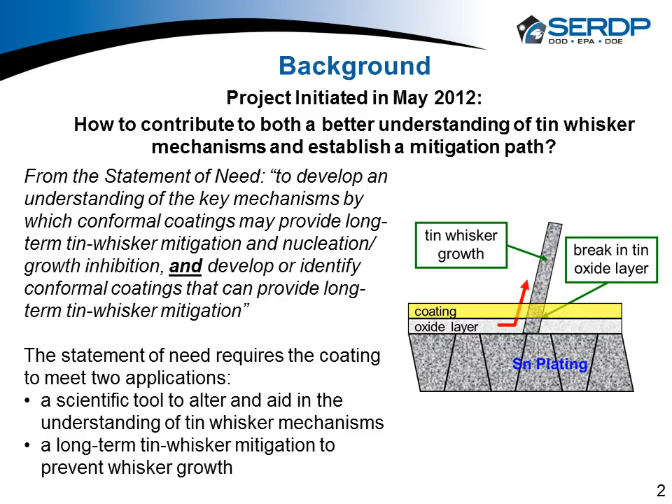I'm on slide 2. I'm going to go to slide 3. And Rockwell's approach is to look at a family of materials called alkali silicate glasses. And one we have been using, as I'll talk in a couple of the other slides, we've been using the ASG, or I call it liquid glass, in some other systems, so we thought it was applicable to whiskers.

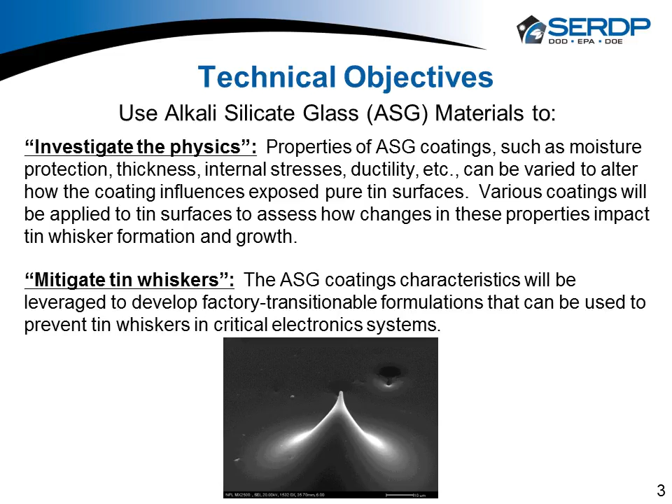And more importantly, the properties of liquid glass, the ASG coating, they can change how moisture goes through surfaces. They're very tailorable, and we felt that it was a system that offered some advantages to how we could impact tin whisker formation and growth.

So if you go to slide 4, from our technical approach, if I put my engineering hat, or my scientist hat on, say, what do we need a conformal coating to do in terms of how it protects our electronics? Or maybe more importantly, what do I want out of a coating that changes whiskers' behavior? One of the things would be, can it stop moisture? Can it alter the corrosion of tin oxide?

And SERDP has a couple other projects going right now with Dr. Stephan Meschter and Dr. Polina Snugovsky looking at corrosion. And they've made some really neat discoveries and findings with their results showing that moisture and whiskers, there is a relationship there. So any coating that's going to impact whiskers has to deal with corrosion. A coating ideally would bond to the outside layer of tin in the tin oxide. Being bonded would change some things around, especially having a whisker initiate and form.

You'd like the coating to be tailorable. So do I want it rough? Do I want it smooth? Do I want it to have less stress, lower, higher stress? What can you change in the coating that could then impact whiskers?

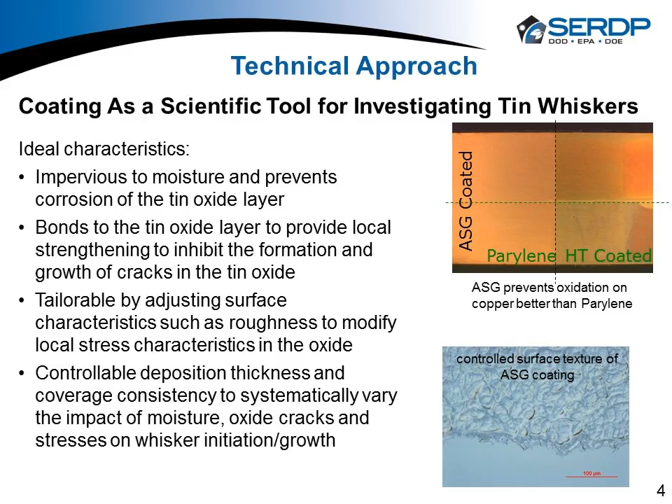And of course, I want to be able to deal with the coating in terms of its deposition thickness and its coverage. If it's a great coating, but I can't get it down in a repeatable, consistent thickness, I'm in trouble. Or if I have trouble getting it to have good coating coverage consistency, then it's not the most ideal thing to work with.

If we go to slide 5, put my engineer's hat on. I'm out on the factory floor building electronics. One of the things I want my coating to do is I want a high modulus, I want a high hardness. So if a whisker does initiate, it's going to have a tough time working its way through the coating.

And again, SERDP also has some sister projects to the project I'm presenting today. Dr. Stephan Meschter and the gang are working with putting particles in coating. And so this project looks at one method of slowing down whiskers, and SERDP has a couple others that both look like they're going to yield some things.

Whatever coating I have, it really has to be able to cover the complex surfaces of an electronics assembly. Electronics assemblies have a lot of skyline, a lot of X, Y, and Z dimensions. I want to be able to coat the edges of leads, behind the leads, areas where whiskers might initiate and grow.

Number one, and I get beat up by my folks here at Rockwell all the time, don't create some process that's some special, unique, we've never seen it before. I want to go out to my typical factory. I want to be able to use typical temperatures.

I want to be able to cure it in conventional ovens. I don't want to have to go buy a $3 million machine that this is all it does. Of course, the factory folks, they want short deposition times, short cure times. They're looking at their process cycles. And then, of course, last, want to be able to rework this. So that's kind of the wish list from a science or an engineering perspective.

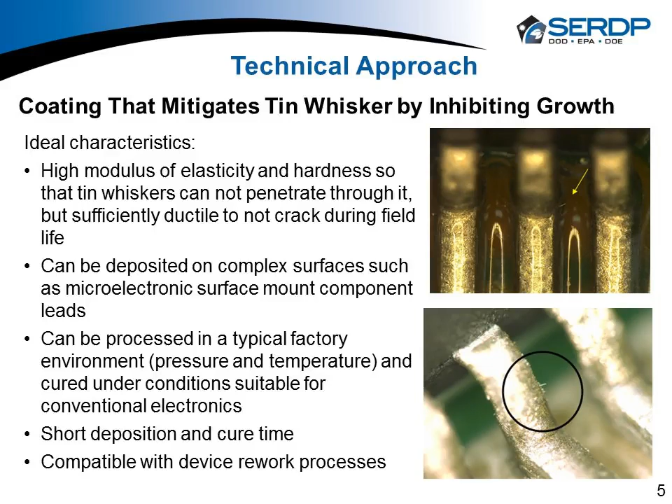If we go to slide 7, a little bit on liquid glass or alkali silicate glass, ASG specifically, kind of a very nice material. We've been using them for a couple other things, other products, but you can control the deposition rates. They're highly tailorable to what you want to do. They also cure, and essentially when I say cure, these are coatings that are based on a water solution, not solvent solutions, so you're driving off the water. But it happens at right around 120, 125 degrees C, and those are temperatures we see in the factory every day in terms of curing other types of adhesive materials, so that wasn't a shock to the system.

We know that the liquid glass will work in electronics. We're using it right now on some temperature issues where you're trying to do a lot of heat transfer. You can put diamond particles into the liquid glass, and it allows for a lot of thermal type applications. So that's why we proposed this material system.

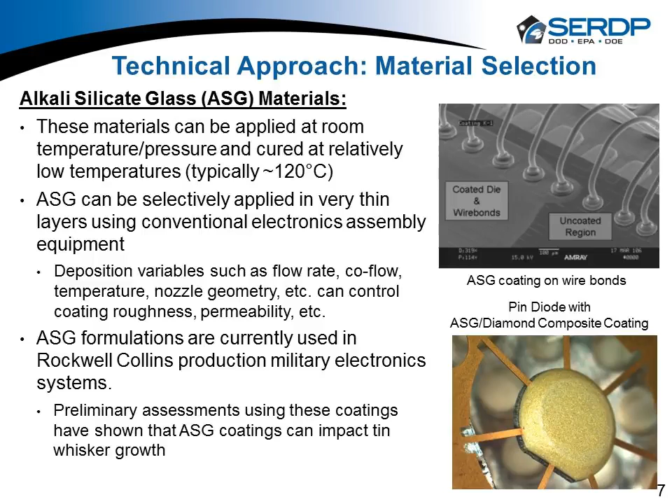If you go to slide 8, our primary test vehicle for all the testing in phase 1 and phase 2 is what we call Tinman. We needed a component I could put in the scanning electron microscope that would not charge up, but I also wanted a component that very much mimicked and was representative of other components I find on my electronics assembly. So we essentially made a 14-pin SOIC, a small outline integrated circuit, and it's all metal.

We're able to take this and coat it with bright acid tin plating. It plates very well, and bright acid tin is one of those things we know in the industry that grows whiskers like chia pets. So it made a great control, because if your control doesn't whisker, you don't know anything else about the other variables in your test.

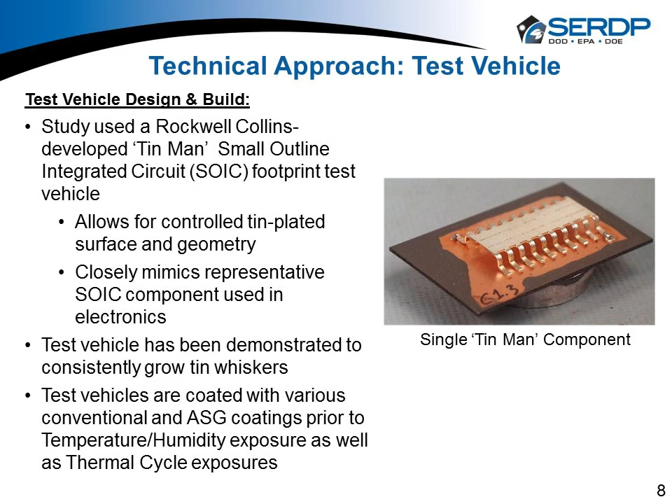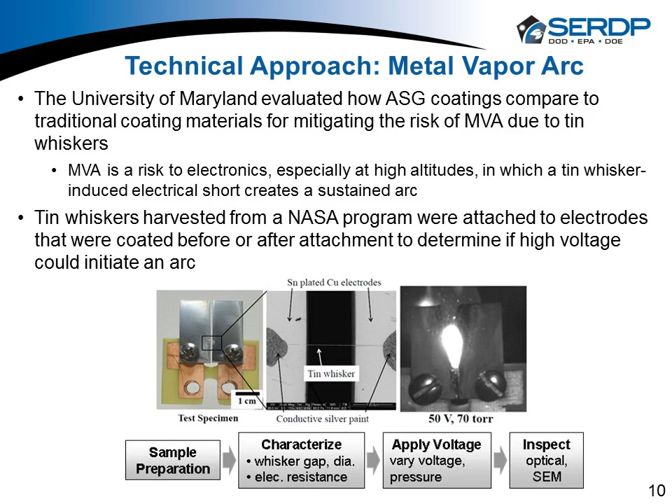But very interesting. I think Mike killed 2 or 3 grad students doing this, but he actually took whiskers and we glued real actual whiskers across 2 electrode surfaces to create the test specimens. And I'll talk about some of those results, but some very neat things we were able to learn out of the program. Of course, last but not least is the guys at Plasma Ruggedized Solutions.

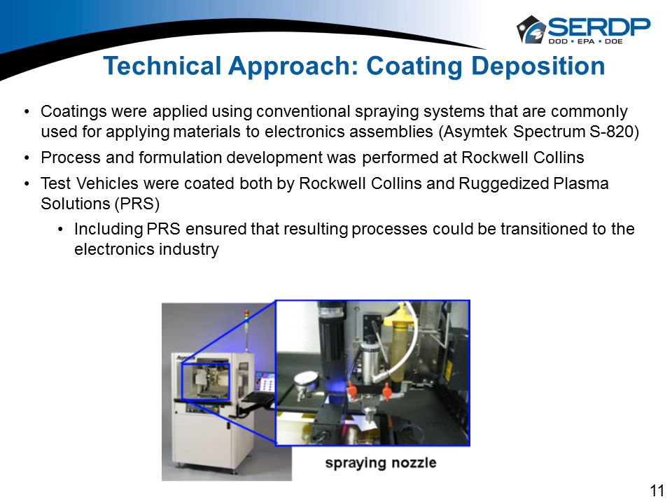Whatever we came up with here in terms of using equipment, could they replicate, and would they have any suggestions on improvements? And we use a standard system, the Asymtek Spectrum S820. We use it in our current operation, spraying conformal coatings. It's a widely used piece of equipment around the industry. So that got us back to being away from some specialized type of thing.

If you look at the program overall, we split it into 2 phases, each phase being 1 year. Phase 1 was some pretty heavy developmental, looking at the material, getting the initial formulations of liquid glass and seeing how they performed. And then phase 2, we left ourselves a little bit of a window to try taking what we learned in phase 1. Do we need to change the formulations, improve the formulations? And then in phase 2, as you'll see on further slides, we got into building real assemblies.

I'm a big one on testing widgets, but widgets don't tell you the real thing. We felt you needed to get out on the production line and try some things. So that's what we're going to cover in phase 2. And you can see in the graph here, we've tried to highlight each of the partners where they worked. Primarily in phase 2 was PRS and Rockwell, and the CALCE folks, University of Maryland, was in phase 1.

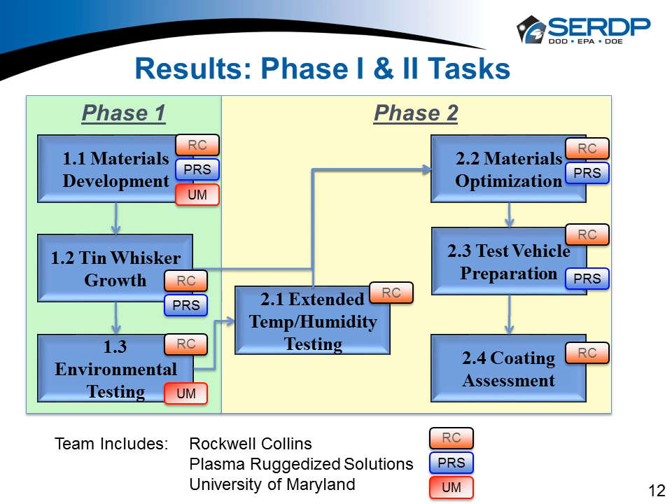One, our pretreatment. It'd be nice if I didn't have to pre-treat a board, but we did show that we needed UV ozone or even some plasma, but primarily UV ozone to prepare the surfaces. We're spraying the liquid glass on a standard circuit board, so you're seeing plastics, metals, solder mask, a number of organic and inorganic things, and the UV ozone just promoted better adhesion for what we wanted to do. We also learned that to really control our thickness, we had to watch our barrel pressure and our co-flow pressure. And we found a number of interactions we made sure we controlled as we sprayed.

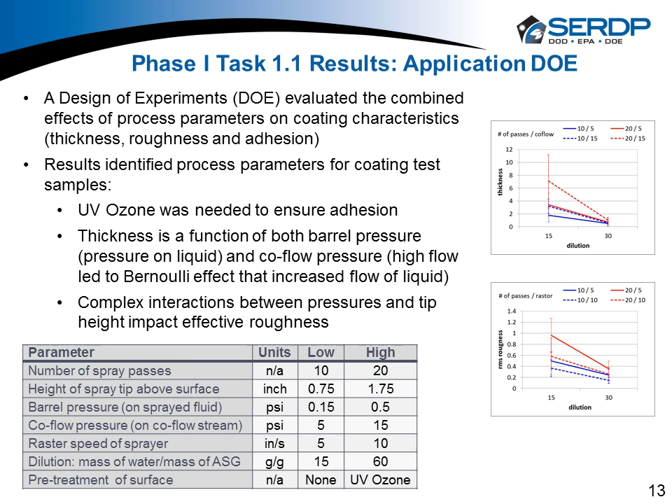From our industry work, where the lead is bent during lead forming, that's the high stress area, and that's where we saw most of the whiskers initiate and start to grow.

We also did a second set of boards based on discussions with Dr. Stephan Meschter from BAE and some of the work they're doing in their SERDP projects. We kind of teamed up. We wanted to see - one set of these specimens was going in and out of the humidity chamber every 500 hours. We'd take them, look at them in the SEM, put them back in the humidity chamber, but that's about 24 hours of exposure. Did coming out of the chamber change the behavior?

So we had a set of specimens that we pulled out, inspected, and never went back in. Those were staggered such that we would accumulate 500 hours, 1,000 hours, 1,500 hours, trying to see if there were any differences there.

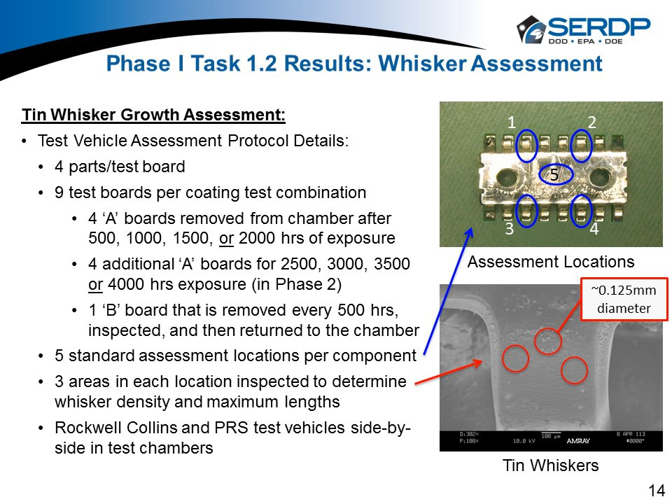When we looked at these specimens, we got down to looking at each of the 5 areas, and we would go in and measure 3 different areas randomly. It's a 0.125 millimeter diameter, and we would measure lengths and measure whisker density. That's how we were tracking what was happening between the different variables in the design of experiments.

To go to slide 15 - when we started into this, based on the early work looking at the materials, we picked two different types of liquid glass, or alkali silicate glasses. You'll hear me talk about ASG4, which was a little more ductile formulation, the way the team looked at it. It didn't put as much stress into the substrate it was sitting on. And then we also looked at ASG5.

ASG5 was a little more stressful coating, but ASG5 also gave us better environmental robustness. Oxygen, moisture, things would not move through it or diffuse through it nearly as readily as ASG4. So it gave us two different angles to look at that.

Versus the ASG4, which is a lot less of a rigid coating with less stress, we didn't see nearly the behavior that we had with ASG5. That was nice - some of the science we were putting in, we were seeing differences in how you can formulate the composition of those coatings. It ends up that both formulations perform better than the control, but in the end the ASG4 coating was doing much, much better.

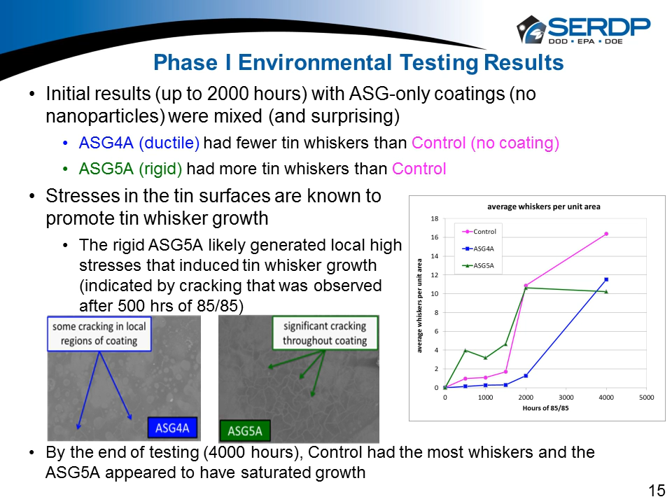Okay, thank you. We weren't expecting that, so again, some of the science we learned along the way, we thought that was pretty cool.

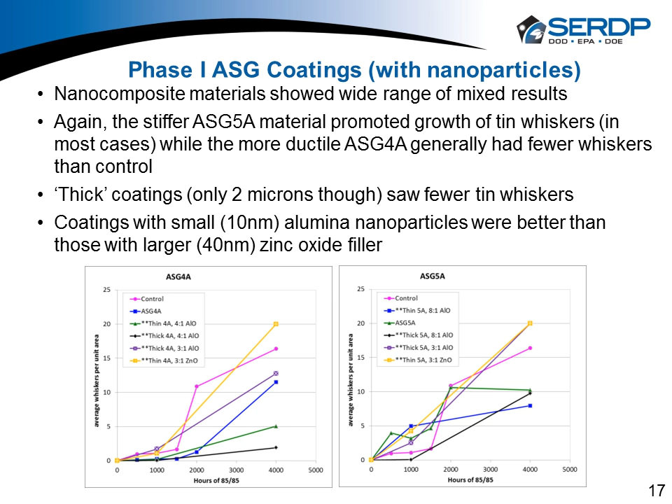There's still an acrylic coating over the top of it, but it's worked its way out. By the first couple thousand hours, of course, the conventional coatings looked better than anything. By 4,000 hours, everybody got up towards what our controls were showing.

A little tough time looking at Parylene. Parylene's a very uniform coating put down by vacuum deposition, but even with the Parylene, we got to that point. I think what was more encouraging was the samples coated by Plasma Ruggedized Solutions had the same behavior as the samples that we coated here at Rockwell. So someone using the same machine but a different facility, different state, completely independent coater of sorts, we ended up in the same place.

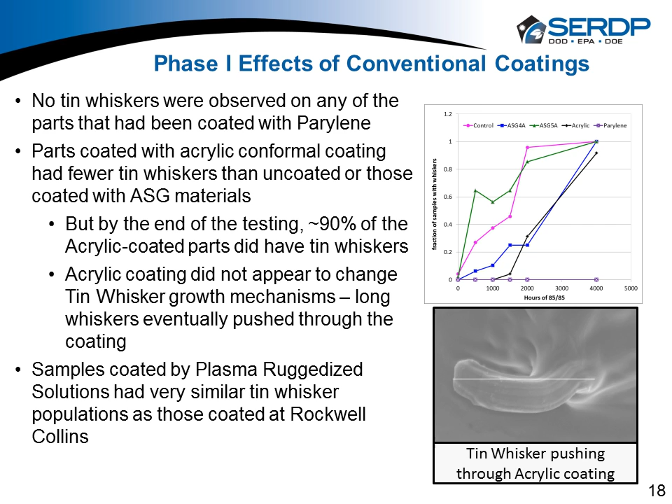One other thing to report on Phase 1 was the thermal cycling. We did 1,500 total cycles. That's what's called out in the industry specifications. And again, that was minus 55 degrees C to plus 125 degrees C, about a 1-hour cycle. It's truly thermal cycle, not thermal shock, so we transition at less than 10 degrees C per minute.

So we wanted to prove that we couldn't spall this coating off, that it was well adhered to the leads, the metallic leads on the components on the plastic. We didn't do any more thermal cycling after we finished this. We put all our efforts into the high temp, high humidity testing.

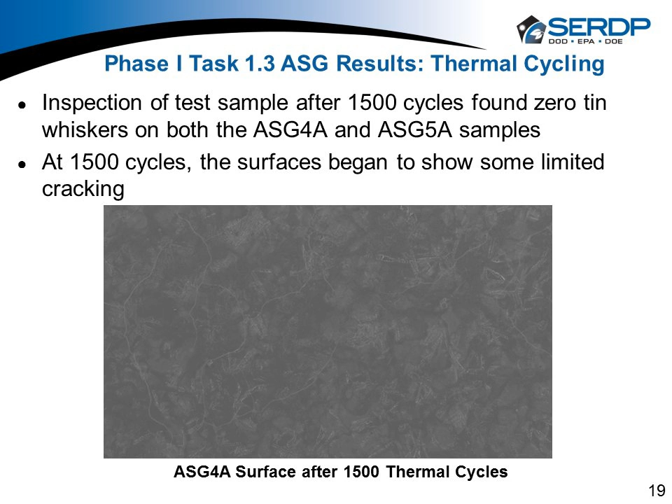And that's important because we wanted to see if you had a metal surface that grew a whisker, and it grew onto a surface that had a liquid glass coating, an acrylic coating, or a parylene coating—what would happen? Because a lot of people in the industry use that as a mitigation. We were able to show, during the program, that you are getting mitigation—that a whisker just touching the surface isn't enough. It has to grow through this surface and make metal contact. So somewhat obvious, but that data didn't exist in the industry. Now it's out there for other companies to use.

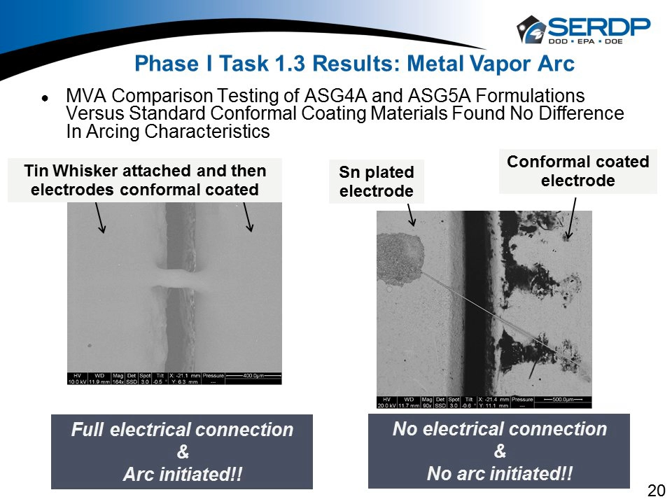If I go to cell 21, so at that point, well, that's phase one. We finished up. We were able to figure out what direction we wanted to go with coating. We figured out what we want to do with nanoparticles. Mike was able to do things at the University of Maryland looking at metal vapor arc, and the guys at PRS were able to replicate and show some improvements and things we were able to talk back and forth.

In phase two, we said we're done with widgets. I want to take a board. I want to go fabricate a board and do this. So we took the Sabre board. This is a board you can purchase from Practical Components, and we populated it. They're dummy components, but they're standard components from Amkor, who's a big supplier in the industry. And we're able to build this out on our line in our Coralville facility just like any other electronic circuit board.

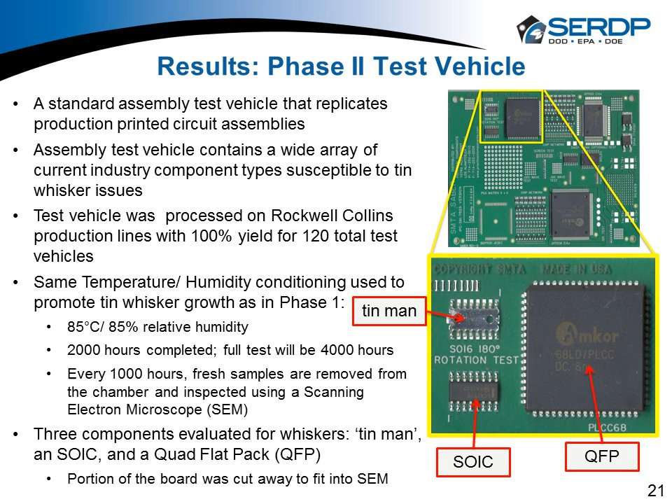They were not soldered down, so they weren't exposed to tin lead. So we ignored the corners and just focused on the middle. Okay, good point. I should have clarified that.

I'm going to go to cell 22. What we also have built into the program is we knew that Nate had seen some other particles that we might want to try. And so we knew alumina was really good, but we said, let's try zirconia. We had some really good results with zirconia on flat samples, not on test boards, but just on glass slides.

At the same time, Plasma Ruggedized Solutions and Nate found that there was a better application head. So we had been using the 787 dispensing valve, and Asymtek came out with an ultrasonic valve, which gave much better application speed and time. And so at phase two, we kind of switched gears a little bit. We kept our phase one valve, but we looked at a new application technology, and then we also looked at a new particle.

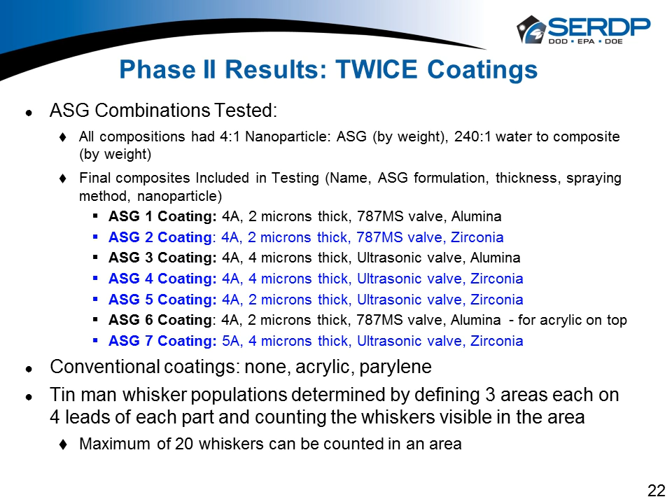Of course, in the test, we kept no coatings for control. We did acrylic, we did Parylene, we did the liquid glass, and we did the same type of measurement, whisker length and density that I discussed in phase one. So I'm going to skip ahead one cell, I'm going to come back. We're going to go to cell 24.

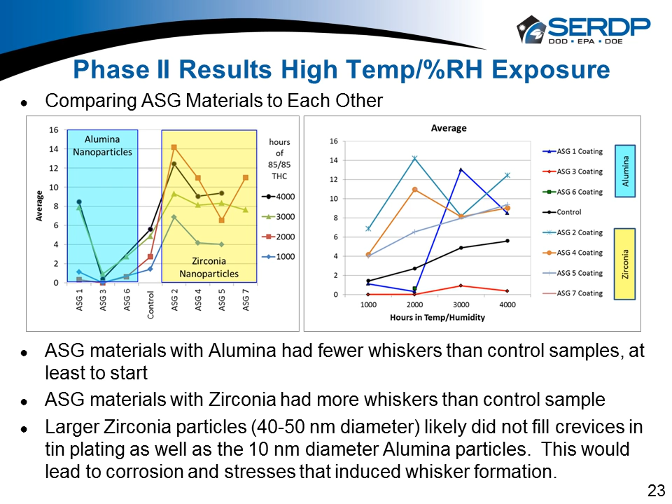If I jump out to slide 25, this is the data that compares how the liquid glass or the ASG coatings did against conventional, which was our Parylene and our acrylic. And sure enough, just like before, the initial 1,000, 2,000 hours, the acrylic and Parylene are looking real good,

but in the last half of the test, from 2,000 hours up to 4,000 hours, as the whiskers continued to grow, and of course underneath there, the acrylic or the Parylene do not have the benefit of having nanoparticles or being able to seal off the surface. They just don't have the same material characteristics.

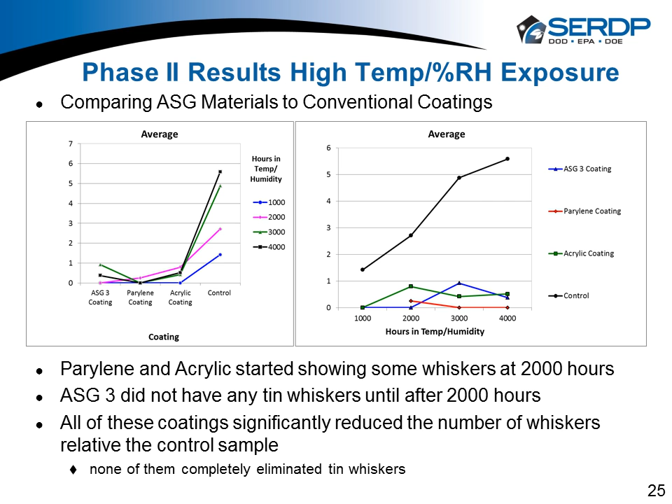One of the big questions that was asked during the program was, okay, coatings look great, but we know from conventional coatings out in the industry, there's concerns about coverage. And this is a picture here of an acrylic coating on our test boards, and you can see that the very sharp edge of the toe does not retain coating, or the back side of the lead here on the picture on the right on slide 26.

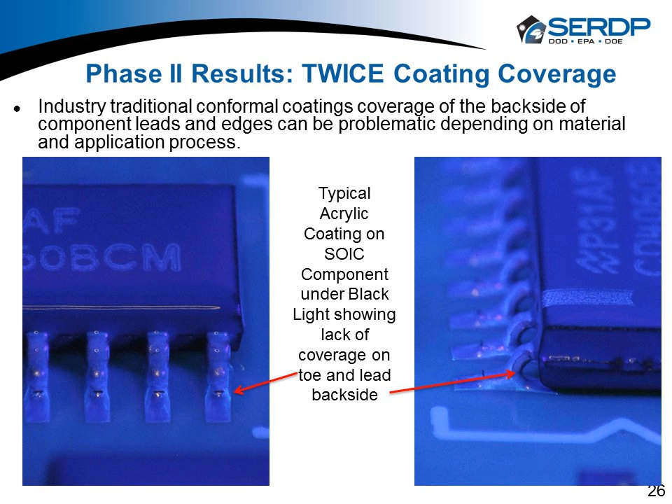You can see where under black light, we have good coating out here on the solder joint and the face of the lead off the SOIC, but the back side gets shadowed, and just standard conventional coatings without taking that into account leave a problem. So what we wanted to look at is, well, how do the ASG coatings go down?

And the picture here to the right, this is looking at the SOIC soldered down, and hopefully it shows up well, but there's kind of a ghosty, gray, milky look. That is the actual ASG coating. One of the advantages ASG has over conventional coatings is it's very, very thin. It's micron thin. And so physics, where it says on a sharp edge a coating is going to roll off that and not wet, is much more in play than with thin coatings that tend to stick and stay put on sharp edges compared to conventional.

The one thing we did, this picture on the lower left, I actually went in and we cut the pads off the board. Didn't want to cut up here. I wanted to try to keep the surface intact. And what you can see here, it doesn't show up as well as I'd like, but the nice milky ghosting coating view, that's the ASG coating on the backside. So one, the coating tends to go and cover areas that conventional coatings don't cover very well.

And two, because of our setup, we can spray in at different angles, and we have better spray penetration trying to come in and spray, say, at the backside or on this toe or from the top side. Just the nature of the coating lends itself to being applied with better coverage than some of the conventional coatings. Of course, Parylene is the best of all the industry coatings. Vapor deposition can coat everything uniformly. But if you're looking at, say, an acrylic or a urethane or epoxy, the ASG can do a better job of coating. It's on par, the same type of coating that would happen with a Parylene.

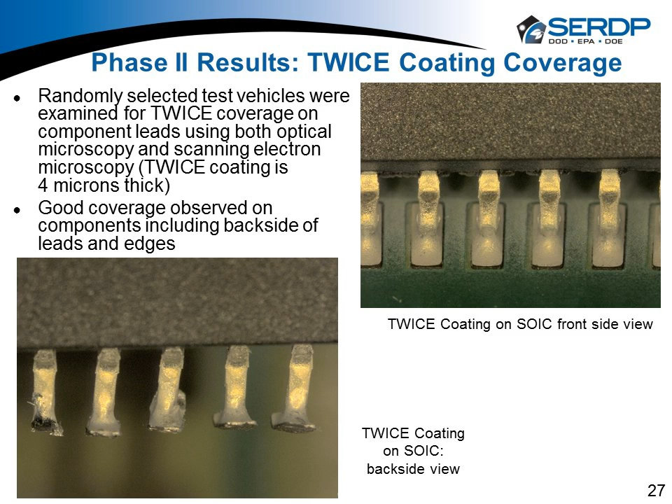We did one more thing I wanted to prove to myself, did I get coating down there? Because, yeah, it looks kind of gray and milky, but is that just optics, the light bouncing off it, or how good did we do? Thank goodness I have a wonderful metallographer who is very good, and we did cross sections, and you can see here's the solder joint, and here's my coating over the top to protect the surface. We use kind of an outer coating of potting, and you can see the coating itself on top of the solder joint right here. Very, very thin.

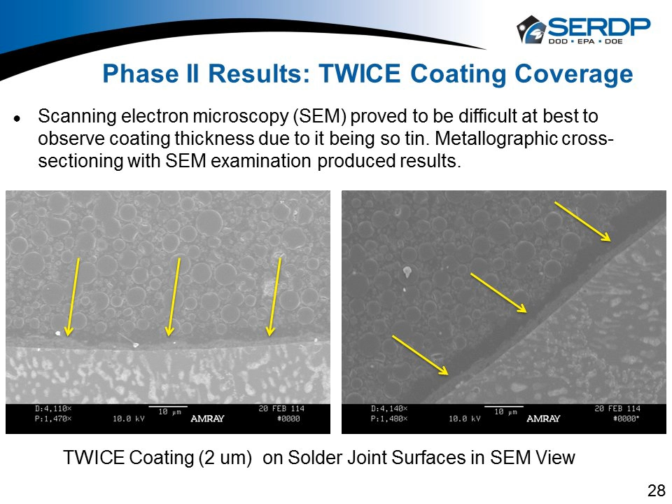This was the 2 micrometer coating that we applied, and this coating is about 1 micrometer to 1.5. So when we spray thinking we're getting 2, and we do out on a flat unencumbered surface, when you get to the topography of a circuit board on curved surfaces and things that have Z height, we're getting from 1 micrometer to 1.5 micrometers. So we don't quite hit this 2, but we clearly stay above 1.

If I go to slide 29, again in phase 2, working with PRS and looking at the new ultrasonic head, we're able to do some process improvements. So if you had the conventional machine that a lot of people have in the industry, and you put 4 heads on that and you wanted to spray a 2-micron thick coating, we could cover a 10 by 10 board in 12 minutes. And then, of course, it's going to be another 60 minutes to bake off the coating at 125 degrees C.

So we were pleased with that because one of my goals was to make sure I'm in line with other conventional coating cycle times. I did not want to have to spray for an hour and then bake for an hour because industry would not be very favorable. They would look at, well, yeah, the coating works better with whiskers, but it costs me 2 hours of cycle time, say, rather than 1 hour.

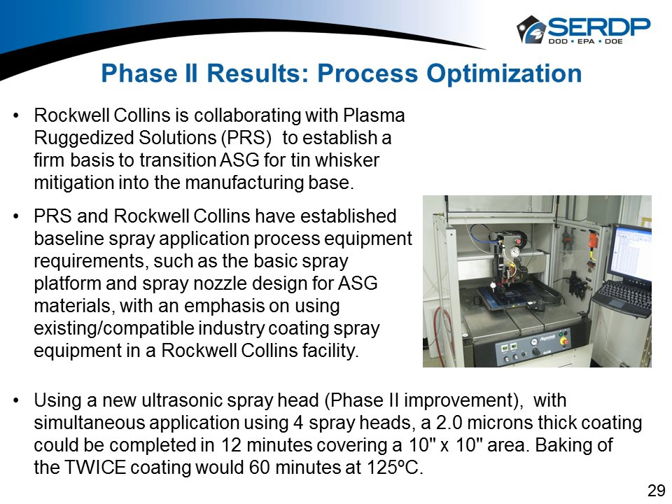And we wanted to try to hit that sweet spot where when you look at transition to an industrial base, you're more in line with what they're doing. And we were able to achieve that with the new head and doing our machine configuration. And PRS was able to do the same thing, so we were able to replicate that.

If I go to slide 30, this is brand new. No one's seen this unless you've read the final report. We were able to finish up, and we still had some funding that we had not expended, so we wanted to look at the RF characteristics. Dr. Nate Lauer was doing some other stuff with RF, and so we wanted to look at this, mainly because the microwave and RF design community of the world, they can't use conventional coatings, or as you'll see from our data, maybe they think they can't use them, but they tend not to use conformal coating because it messes up the RF signal, which tends to run on the surface of traces. And the ASG coating is so thin, we believe that it wouldn't mess with the signal whatsoever.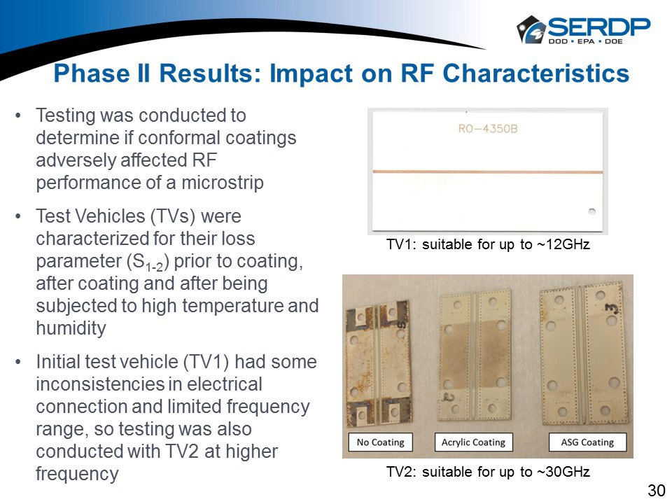So we had a couple different test sets here. One of the vehicles we tested up to about 12 gigahertz, and the other one we tested up to about 30 gigahertz, looking at what would happen with signals in those ranges.

If I go to slide 31, you'll see I'm not a Sparky, I'm a material engineer, so I don't quite understand these graphs very well, but what they tell me is if the coating was impeding the signal, you would see spikes in here. You would see differences across the signal for the different types of coatings. And for the most part, the signal without the coating and the signal with the coating, they're all on top of each other. So the application of the liquid glass ASG coating didn't change how the RF signal was propagating down those test vehicles on their signal lines.

We also exposed these samples to high humidity and then really quick got them on the test rigs so that humidity didn't evaporate off. We wanted to see if we could push humidity through. And surprisingly, whether it was before humidity or after humidity, things didn't really change, whether it was acrylic or no coating or the ASG. So we think the RF community might have some more investigation to do in terms of coatings and what it does for their signals.

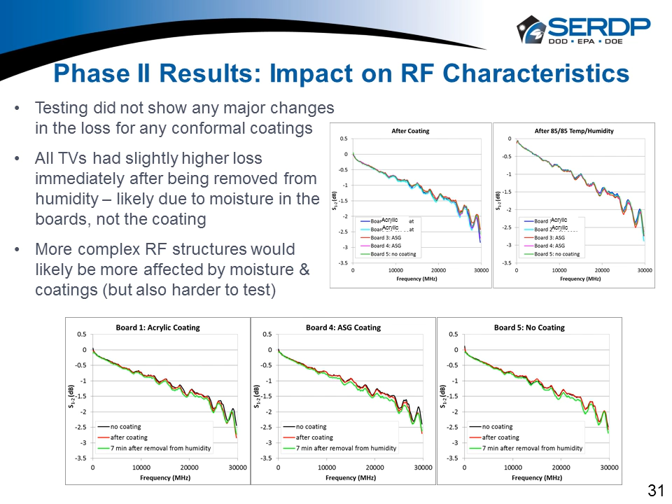We were surprised. We thought we'd see some changes, and we just didn't see any changes. It could be, too, that we need to use a different RF circuit that is more sensitive, or it could be that we need to expose it to maybe a different product use environment. But at least for the little we were able to do, we believe we were able to show some RF characteristics for both the ASG coating and just conventional coatings.

If I go to slide 32, one of the things we were able to work in during the project was the folks at the NPL lab in the UK. It's the UK's National Physical Laboratory. There we go, couldn't remember the acronym. They are the British equivalent to NIST here in the U.S., and they have a very large whisker test running.

They have a specimen that is electrically biased, shown here on the right, so that when a whisker grows across 2 leads, such as this whisker here in this picture, if it makes a connection with this lead, it will short it out. And so they don't have to put them into a scanning electron microscope. They can just plug it into a computer and let the computer do all the monitoring.

And so we were able to get a set of test vehicles, and they have their own test vehicle. It's got all these little SOIC components on it. There's 24 parts per test board. We have 2 test boards in their test. They put those in, and we've gone now 12 months, right around 8,400 hours with no shorting. Their controls shorted out in the first 2 weeks. So the liquid glass coating is performing very well in their test.

Also in their test, there's 31 other different conformal coat materials. Now, we don't know as much about the other materials other than their type. We know there's acrylics, we know there's urethanes, we know there's epoxy, but we don't know more. Some of the members in the consortia sprayed their coatings with the intent that it's going to mitigate whiskers.

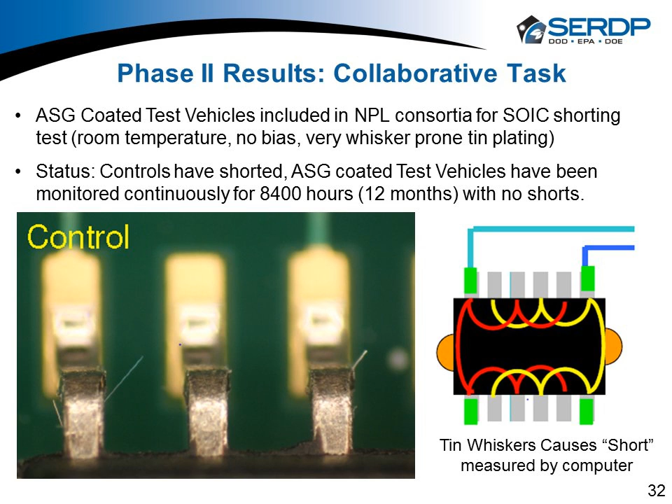If we go to slide 33, this is our project funding slide. This is here on the left-hand column. You can see the amounts that were authorized for Rockwell Collins, PRS, University of Maryland, and then our total funding amount. And then you can see what each of the members expended. We tried our best, but we didn't quite expend everything. There's still a little bit of money left that SERDP will get back and can allocate to maybe someone else who's needing funding. But there's, I think, 10 or 12K in here. But we came pretty close to being on target with how we planned the project for our expenditures and our time.

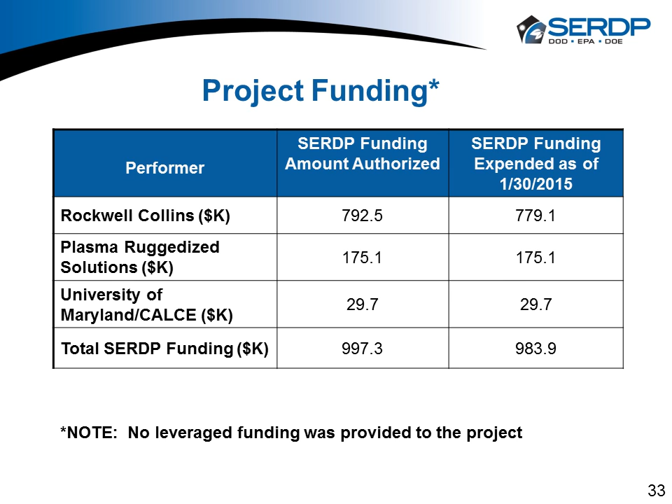We're also working to find some funding. We'd like to look at vibration, drop shock, fluid susceptibility. A lot of electronics have to withstand Skydrol, which is hydraulic fluid. And then we're working with PRS to make sure that this coating would be available for anyone in the industry. If they wanted to go to PRS, they could spray it for industry applications.

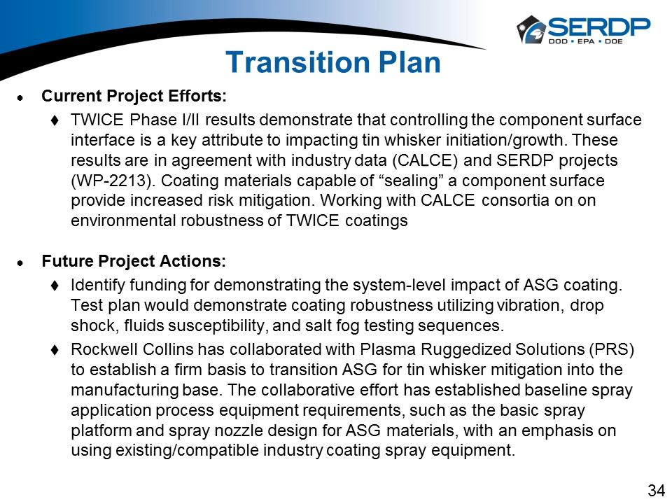Conclusions, I'll let everybody read it, but in general, we felt we were very successful at showing that we found an industry piece of equipment, an industry platform, that another company without our knowledge could go and spray this coating. We didn't need any fancy process or special equipment. We were able to understand that the liquid glass is tailorable and that particles in it, especially alumina, is a direction to go for the future, lower stress. And

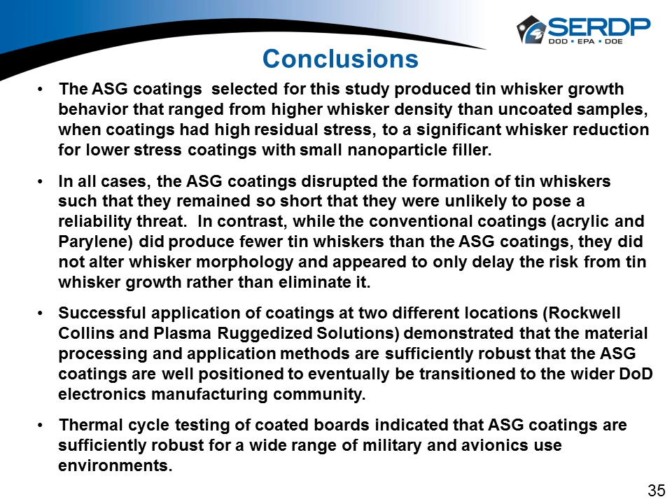I just got my smartphone. I am not a social media animal. As my son says, I use Facebook. He says, just embrace the horror, Dad.

So I'm not a big one on social media, but we're working with our Rockwell Collins business communication folks and finding out how we can put this out on our Facebook page and go out on our Twitter flows and publicize a little bit of what we've been able to do with the TWICE coating, so other people raise their awareness and maybe get other people to start to look at it and use it. That's my last slide. I'd be happy to answer any questions someone might have.

Let me start. We can probably help you with the social media too. What we need is to have stuff that you say is publicly approved for public release. So once we're at that stage and have this ready and good to go, we'd like to help publicize that.

But I also want to ask you about actual literature publications. Several of the publications, or maybe each and every one of them, was a briefing that you gave, and I want to know if there's another forum where some of the work you've done can actually be put out in the open literature.